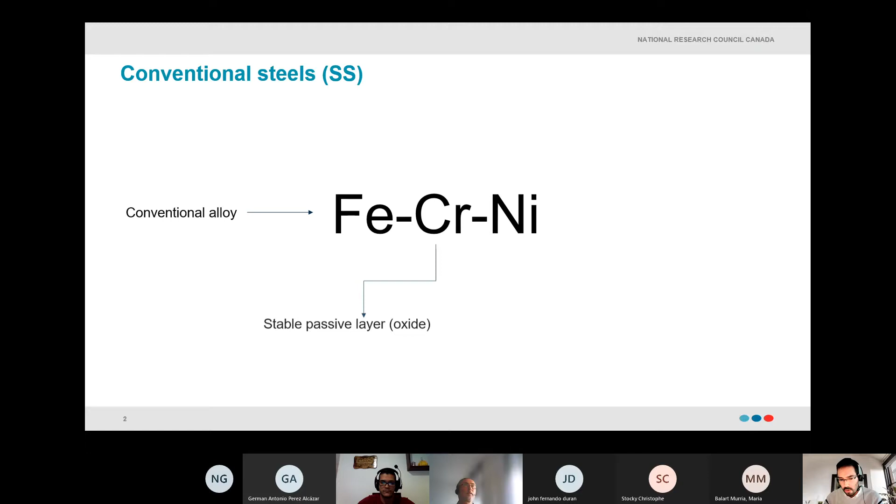So conventional steel, there are many, but I decided to put here the stainless steels. We already know that chromium forms a stable passive layer, and nickel is a gamma stabilizer. Both of them are expensive elements.

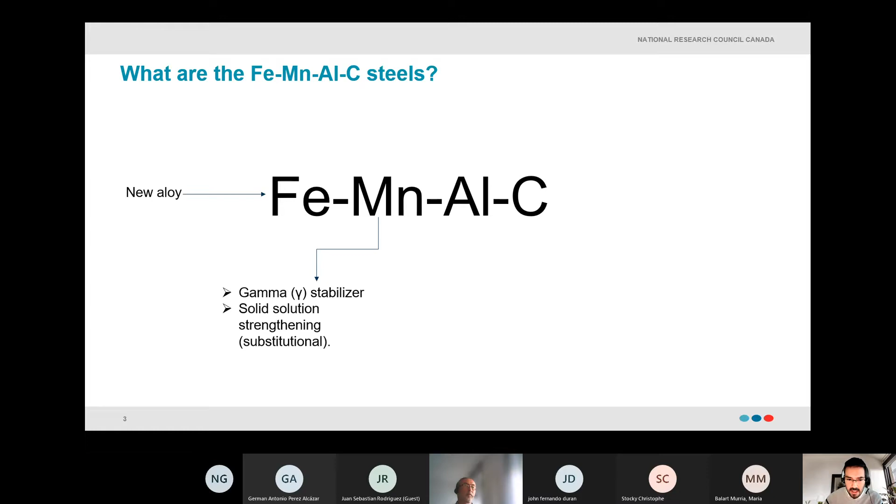So what are the iron, manganese, aluminum, carbon steels? Basically, it's a kind of new alloy which consists of manganese, aluminum, and carbon. And the manganese has the same effect as nickel, because manganese is a gamma stabilizer, a solid solution strengthening element in the substitutional way.

The aluminum in this case produces a stable passive layer similar to chromium. The aluminum is also a ferrite stabilizer, favors the κ-carbide precipitation, and due to its very low density, it will decrease the steel density in a remarkable way. And the carbon is a gamma stabilizer and solid solution strengthening element in the interstitial way.

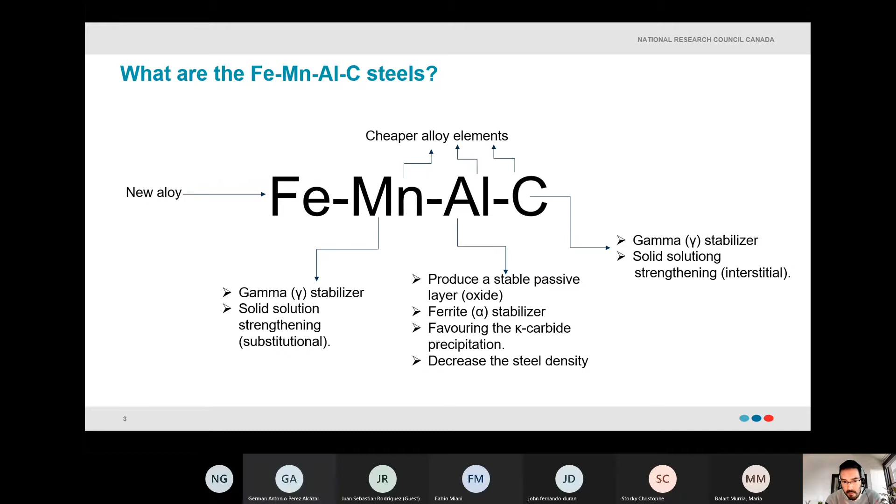But the main difference with conventional alloys is that manganese and aluminum are cheaper alloy elements, and that is really important in the market. Here is a brief figure about how the interest in these alloys has become important in the last 50 years. This is a chronological result in Scopus using two different search terms, iron manganese aluminum carbon, and lightweight steels. So we can see that over the last 50 years, the interest is going up drastically.

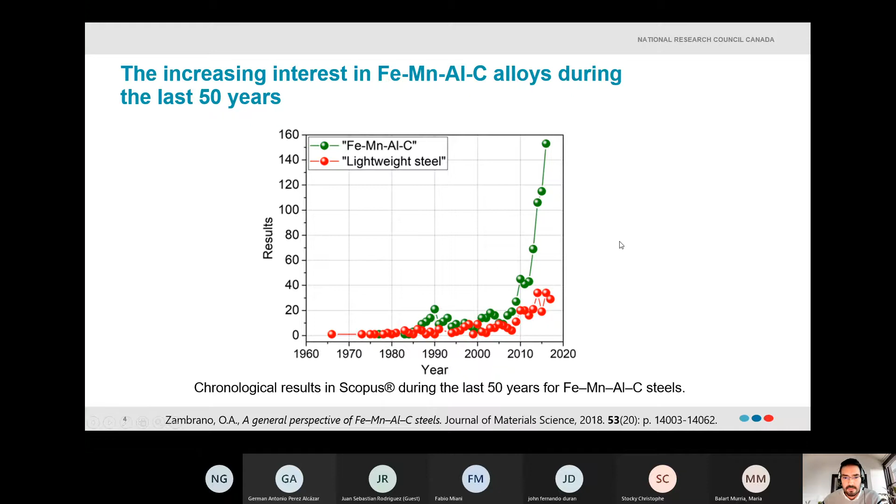Let's look at some mechanical properties of these manganese alloys to put us in context. On the y-axis we have elongation, and on the x-axis tensile strength. We have different families: aluminum, magnesium, titanium, and the whole range of carbon steels with different heat treatments. What makes these materials special is the good combination between elongation and tensile strength. We have a family of these alloys with different manganese and aluminum contents, which makes for really interesting different applications.

Here is a graph of mass density versus aluminum content. As we increase the aluminum content, we get a drastic decrease in density. We can achieve density reductions of about 18%, meaning close to 6.5 grams per cubic centimeter, when compared with conventional steels at 7.8. So we have a really interesting effect of aluminum in these alloys, and that's the main reason these alloys are called lightweight steels.

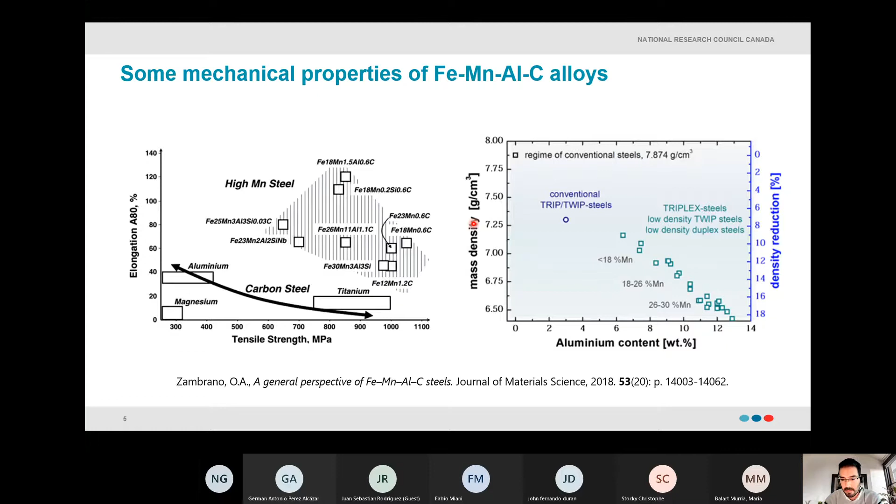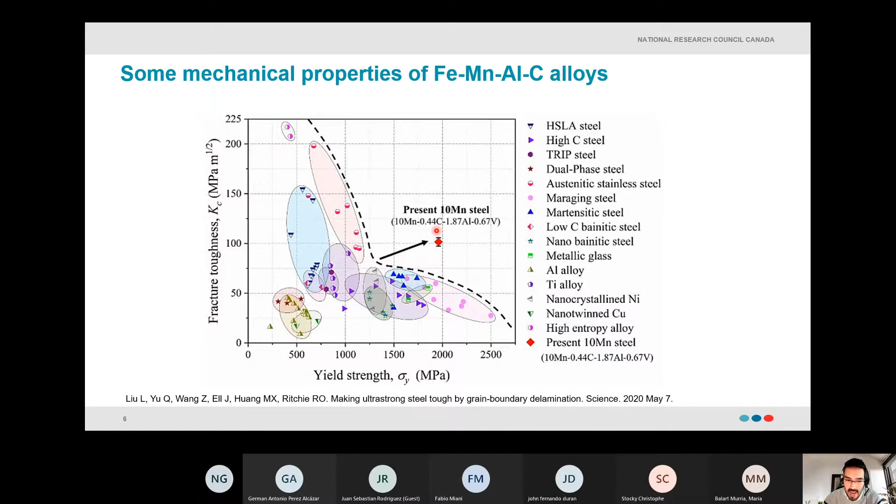This image was taken from this research, where they developed a new manganese aluminum alloy. We can see here how the properties as a function of fracture toughness and yield strength compare to other families. For instance, austenitic stainless steel is this pink circle here. Austenitic steels have really good fracture toughness, but the yield strength is below 1 gigapascal, though still pretty good. Comparing with high entropy alloys, the new trend in physical metallurgy, we see really high fracture toughness, but the yield strength is still too low. If we make the same analysis for other materials, we can see how manganese steel stands out when compared with them, achieving really high fracture toughness while keeping the yield strength.

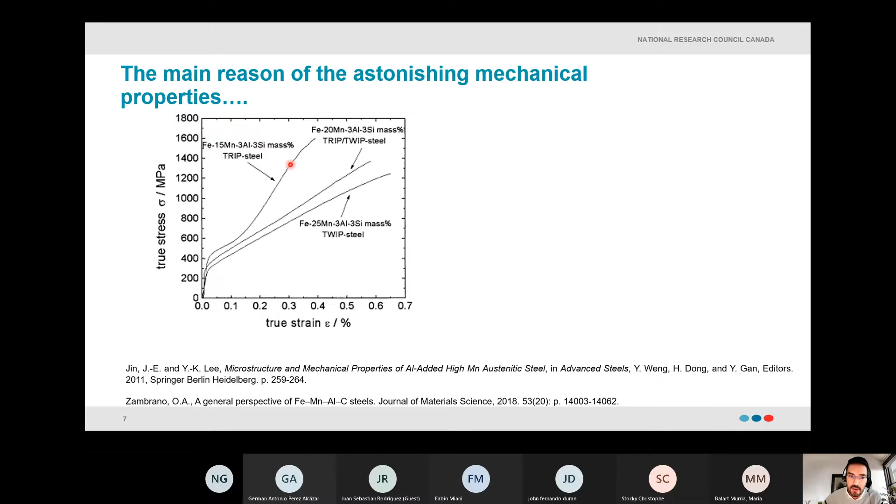The reason behind that is that with this alloy, we can control the chemical composition and the stability of the austenite. By austenite stabilization, I mean we can control the chemical composition to make the austenite less stable or more stable, and that is reflected in different deformation mechanisms. If we make the austenite really unstable, we can promote transformation from austenite to martensite. If we make it more stable, but not too much, we can favor the formation of mechanical twins. And if we make it too stable, we get the formation of microbands made of dislocation arrays. These special deformation mechanisms, which we can control by chemical composition and temperature, determine the mechanical properties of this material.

I want to give a general overview of the current state of FeMnAlC alloys in different industries. In the energy and transportation industry, the world's fourth largest steel making company has been doing research on these materials. They patented these materials in 2013, and currently they are producing liquefied natural gas vessels using this kind of alloy.

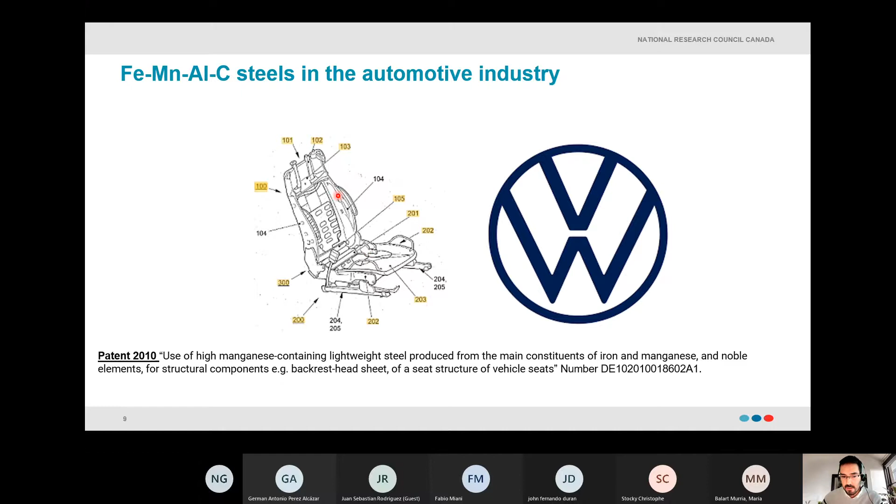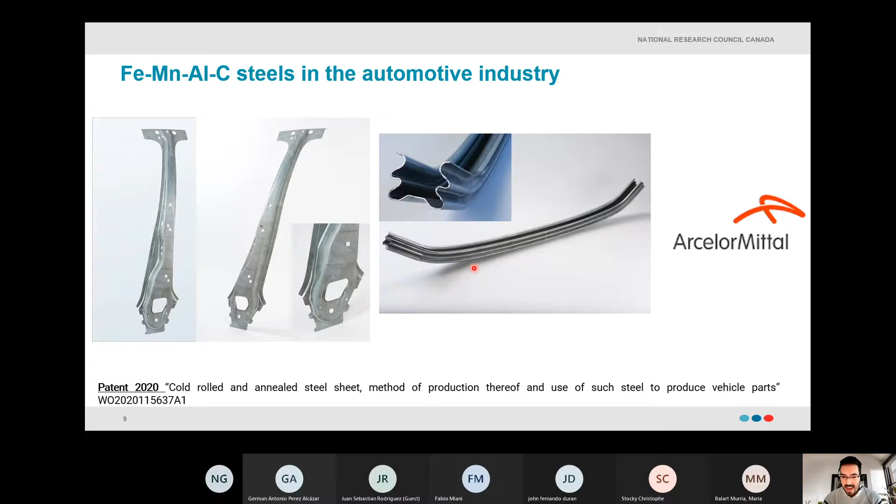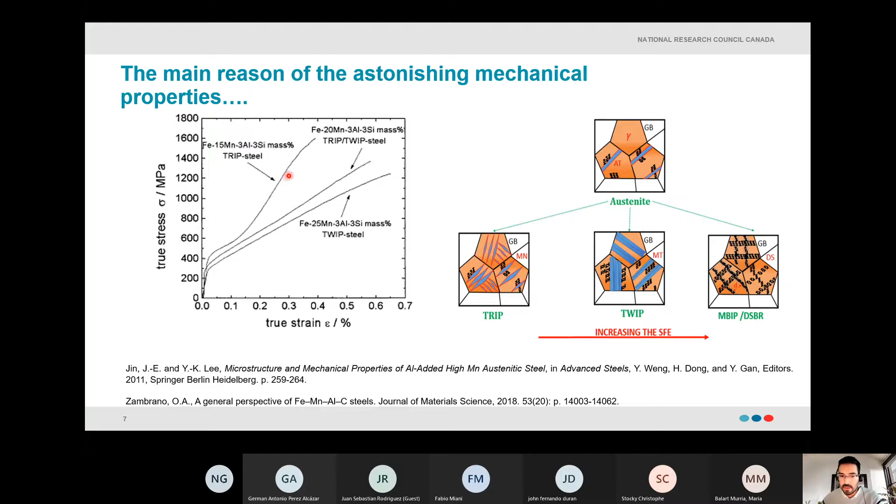In the automotive industry, Volkswagen obtained a patent in 2010 about replacing conventional alloys with this material for seat frames. Similarly, ArcelorMittal patented a method in 2020 for producing these alloys for body car frames. The reason is that in a car accident or crash, the high energy during that process can be absorbed by this material through strain hardening—it becomes harder while also providing some deformation. That's the main reason for choosing this material.

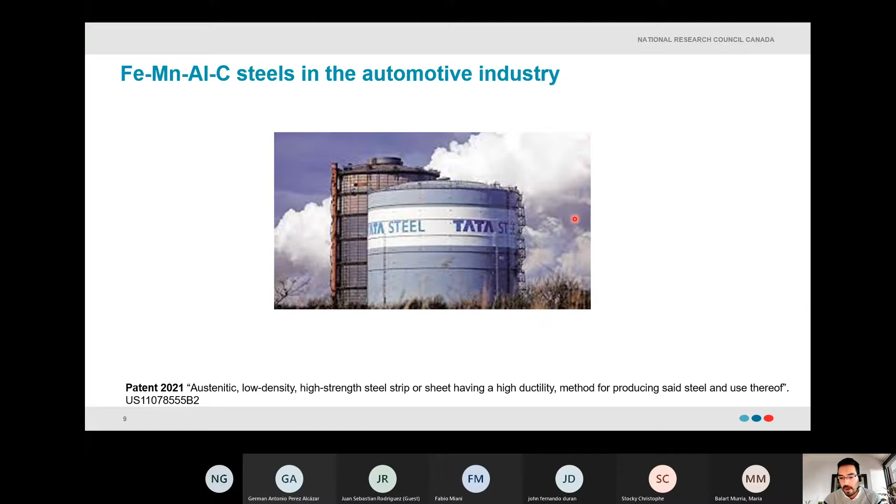Also, Tata Steel patented different methods for producing this kind of alloy in 2021. In 2019, a patent was filed in the army industry context about high aluminum manganese steels. Currently, they are exploring this material for ballistic applications, for instance for tanks and armor.

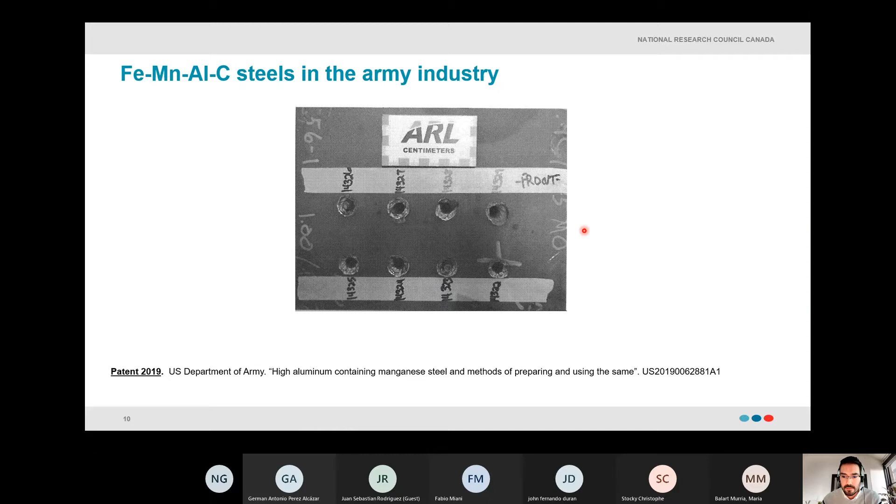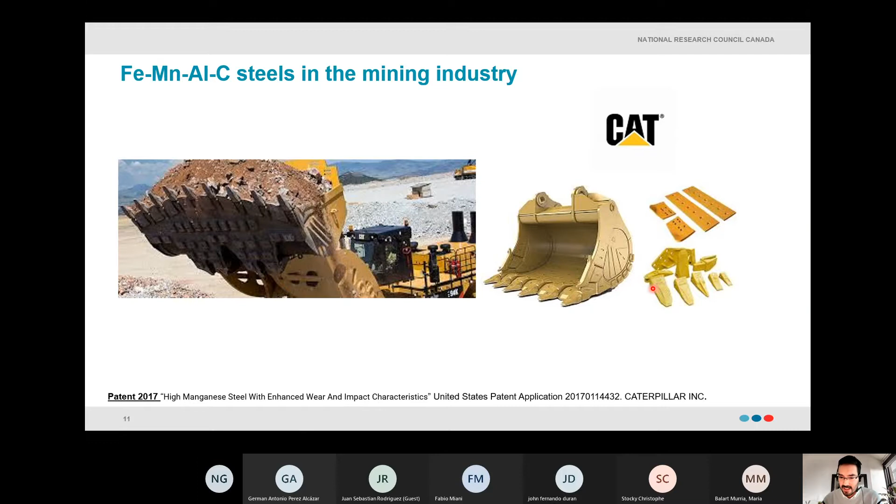In the mining industry, for instance, CAT patented in 2017 different alloys based on iron, manganese, aluminum, and carbon to replace shovel teeth. So basically, they are exploring new materials that can withstand longer times than conventional alloys.

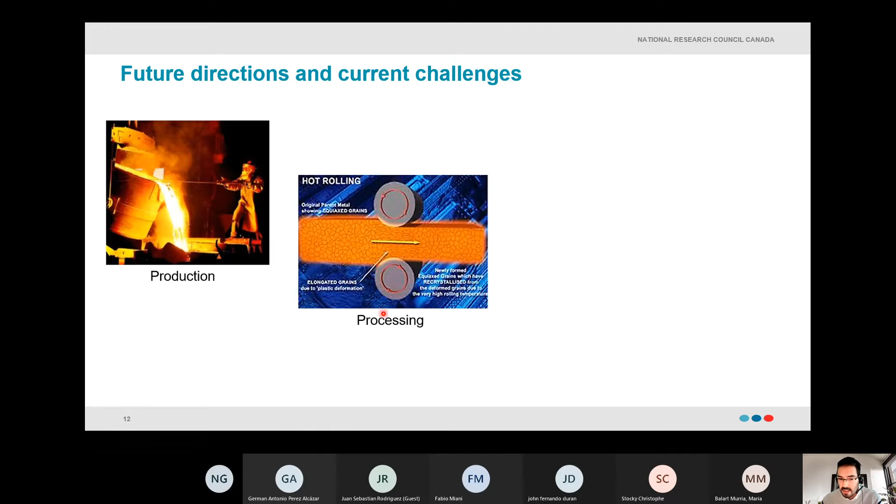In my perspective, the future direction and current challenges are the production of this alloy. Still, there are many challenges in the processing itself and the applications, so there is too much to explore about this material. Currently they are being used for car body frames, but there are many other applications these materials can be applied to.

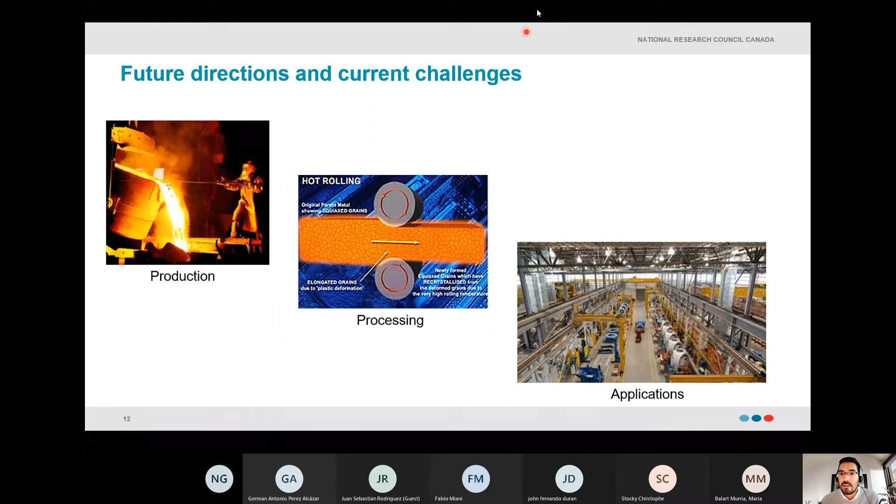So that's what I wanted to say, and I will let the floor go to my colleagues, Sebastian, John, and Professor Germán.

Okay, thank you so much. It's a very nice, quick presentation that takes a very interesting perspective. Okay, thanks.

Hello, everyone. Continuing from Oscar's presentation, Professor Germán, John Duran Perdomo, and I will be talking about a presentation on FeMnAlC Steel.

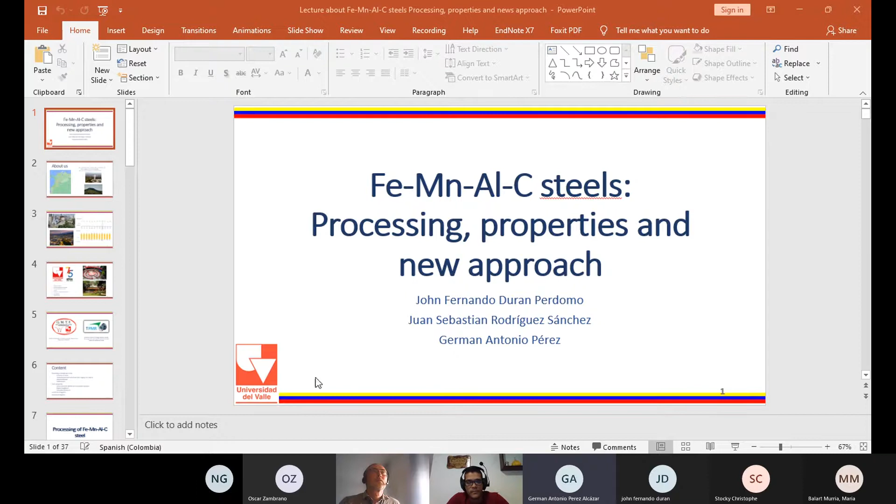Okay, thank you. Well, this is a work that we are performing now. It's a project that we presented to our science ministry and it was approved, joined with a local industry called Organización Hércules.

They are producing sugarcane goods, and the project has the objective to produce iron, manganese, aluminum, carbon steel in order to obtain the best properties to produce sugarcane goods.

This is the project in which we are working now, okay? And John, Fernando, and Sebastian are the doctoral students that are working on this project, okay?

Recently, they were in Mexico, in Morelia, at the Michoacán University, producing 4 alloys, those that we found with the best properties, in order to make a semi-industrial production, melting them in an induction furnace and then rolling them in place to produce the sugarcane goods.

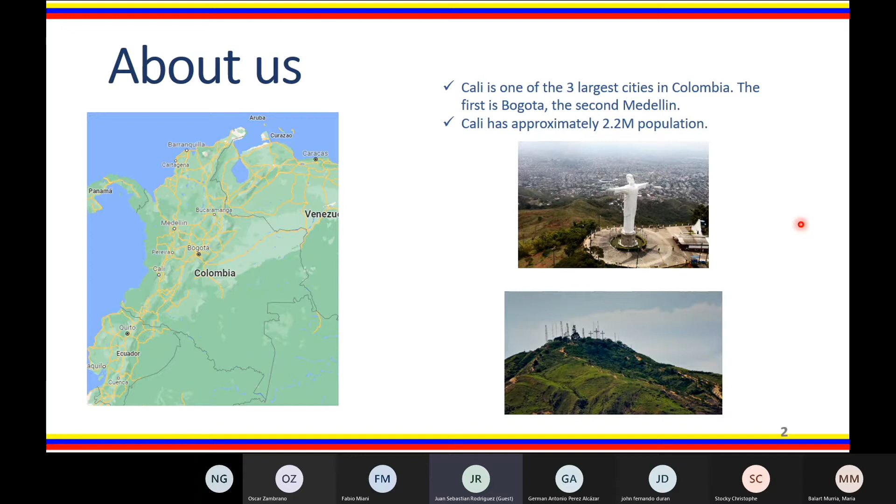One is Cristo Rey. This is Cristo Rey, a monument similar to Cristo Redentor in Rio de Janeiro, located on the Hill of Tres Cruces. According to history, it was made to scare away a demon that in ancient times was in a tomb.

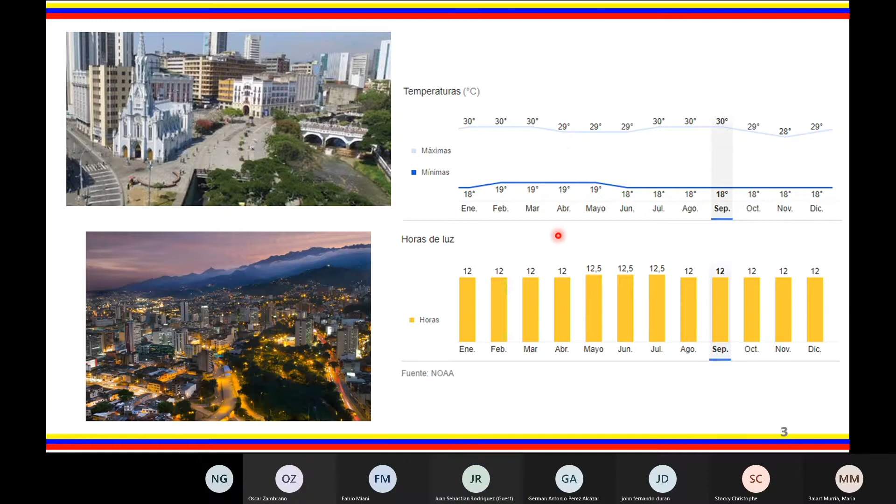As for us, we are researchers who belong to the Universidad del Valle. This university is one of the most important in Colombia. It is a public university and was founded 76 years ago. The university is divided into 7 faculties.

Professor Germán and John belong to the Faculty of Exact Sciences; they are physicists. I belong to the Faculty of Engineering; I am a materials engineer.

Currently, the group that developed this research work is the Physical Metallurgy and Phase Transition Theory group from the Department of Physics, and the research group of Tribology, Polymers, Powder Metallurgy, and Processing of Solid Waste from the Materials Engineering School. This is a research project developed by physicists and engineers.

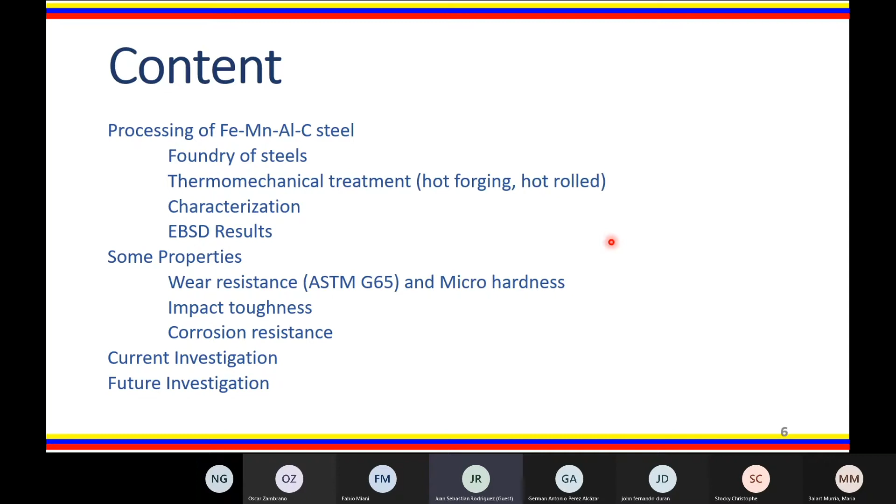The content of the presentation is presented below. This covers processing of FeMnAlC steel, foundry of the steels, thermomechanical treatment, hot forging, hot rolling, characterization, EBSD results, and some properties: wear resistance and micro hardness, impact toughness, corrosion resistance, and current and future investigation.

Here we will mention some of the most important results of our research, and at the end we will be willing to answer some of your questions, and welcome colleagues from the Universidad of Udine. Let me, please—John Fernando Duran continues.

Good afternoon, everyone. My name is John Fernando Duran Perdomo. I am a physicist and PhD student in physical science at the University of Valle in Colombia. I work in physical metallurgy with Dr. Germán Antonio Perez.

In the case of cast alloys, it's necessary to perform thermomechanical treatment to eliminate the as-cast state. As you can read in our paper, a long time solubilization treatment can eliminate the as-cast state, but with an increase in grain size, involuntary evaporation of some elements, as well as interaction of the alloy elements with oxygen. Thus, we are exploring two thermomechanical processes for these alloys: hot compression and hot rolling.

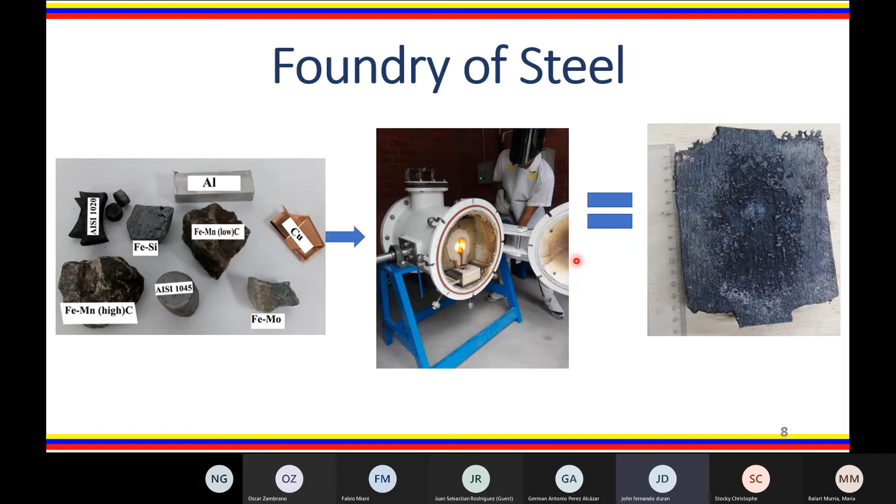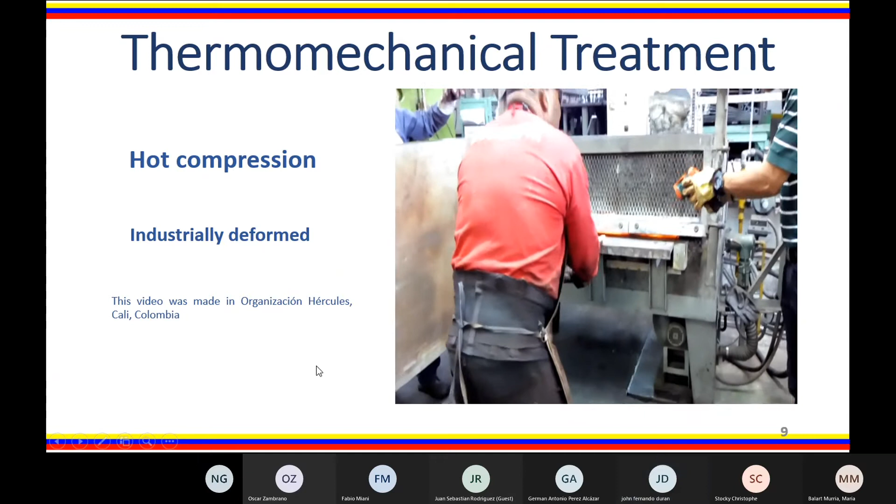There are two thermomechanical treatments that we are carrying out with the alloy studied so far. The first is hot compression deformation while maintaining the furnace temperature between deformation steps, and the second is hot rolling. You can see in the video the hot compression deformation at Hercules organization in Cali, Colombia.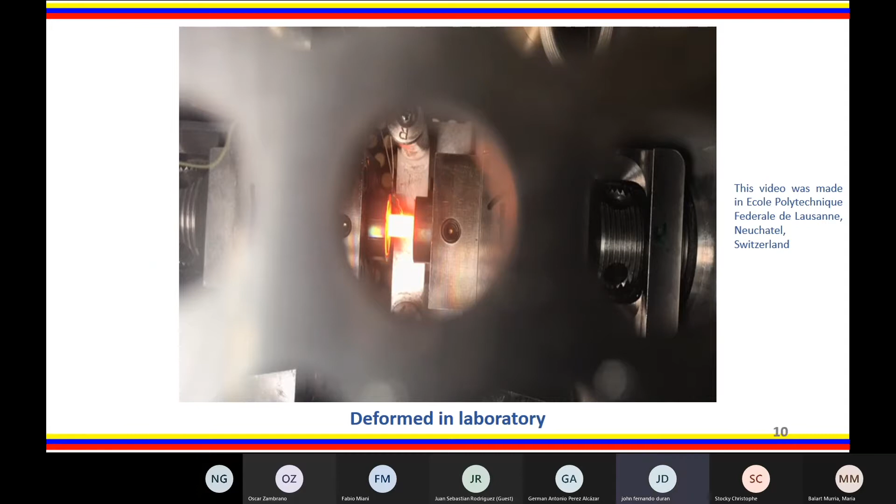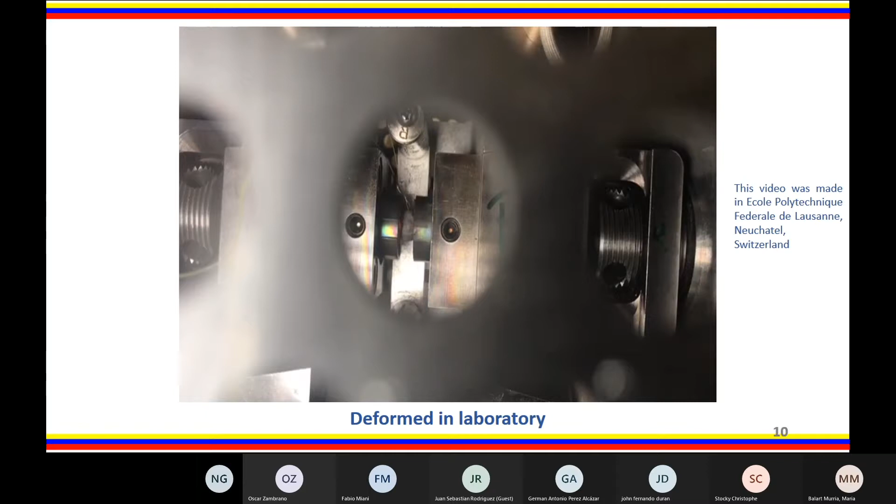I think you didn't click, Sebastian. Okay, it's taking, maybe you can repeat. Next, Sebastian.

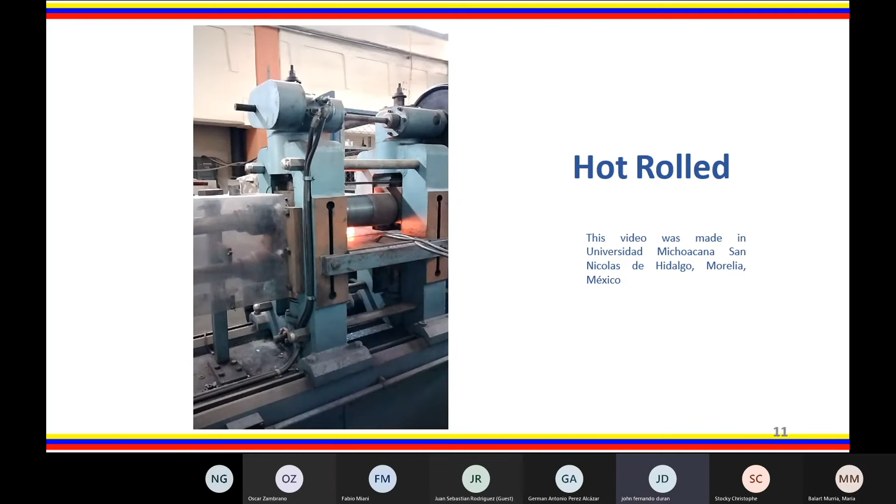Like I said, these alloys have been hot rolled. This sample was produced at the Michoacán University in Mexico. You can see different lamination steps are performed.

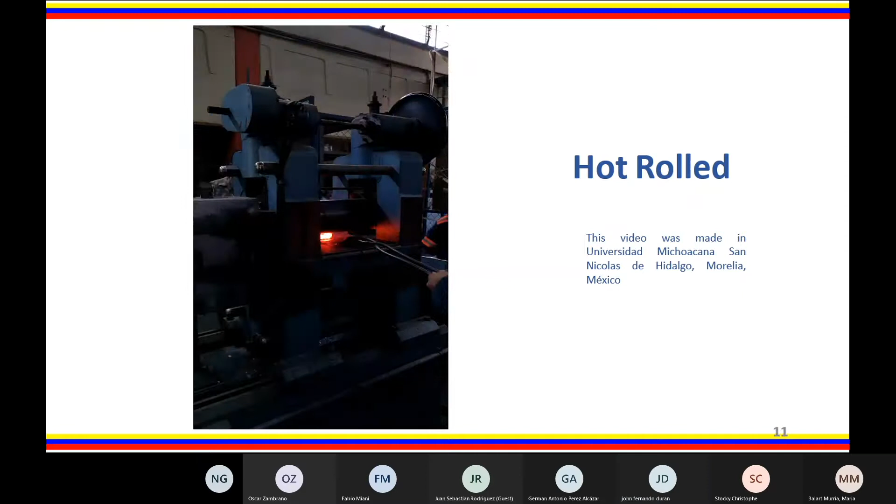To characterize these alloys, we have used different techniques, including Mossbauer spectroscopy, X-ray diffraction, and electron backscatter diffraction.

In the case of Mossbauer spectroscopy, there are three types of hyperfine interactions. The first is isomer shift, you can see a singlet, in this case one peak in the spectra. The second, the quadrupole splitting, you can see a doublet, in this case two peaks in the spectra. And finally, hyperfine field with six peaks in the spectrum, in this case one sextet. These three interactions characterize the chemical environment of iron atoms.

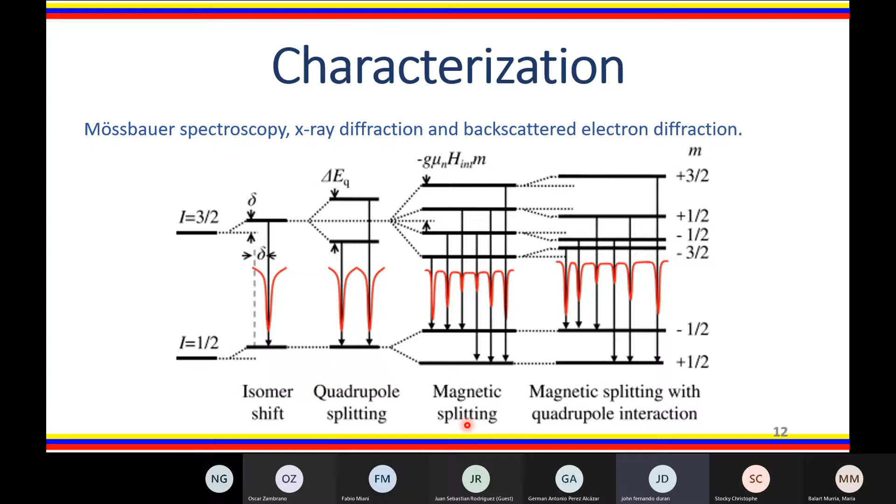Different phases have been reported in FeMnAlC alloys, including austenite, ferrite, martensite, kappa carbide, beta manganese, and other carbides. The figure on the left shows an austenite structure of the steel without any alloy elements. When elements such as manganese, aluminum, molybdenum, and silicon are added, they could replace iron atoms, like shown in the figure, where X represents the different solute atoms.

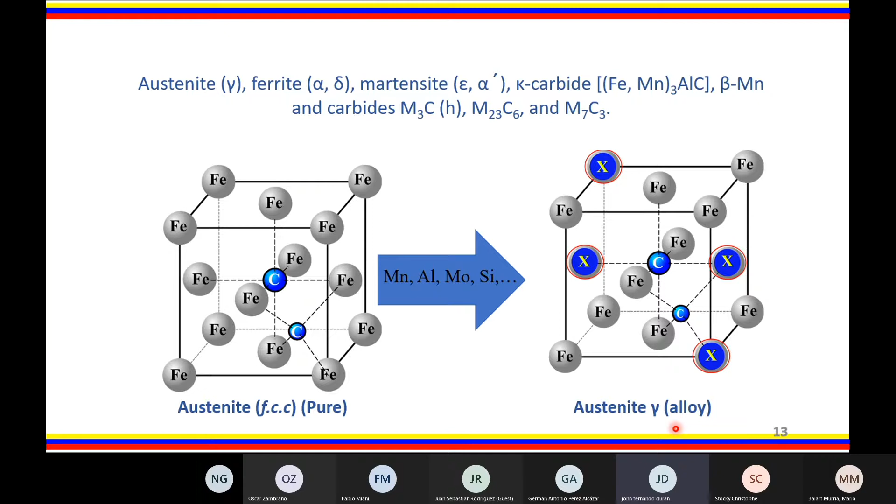The first equation represents the complete spinodal decomposition of austenite proposed by Cheng. In the second equation, you can see the partial spinodal decomposition of austenite that we propose in our paper. Thus, there are 3 austenites: 1 normal or initial, 1 rich, and finally 1 poor in solute atoms, as you see in the figure.

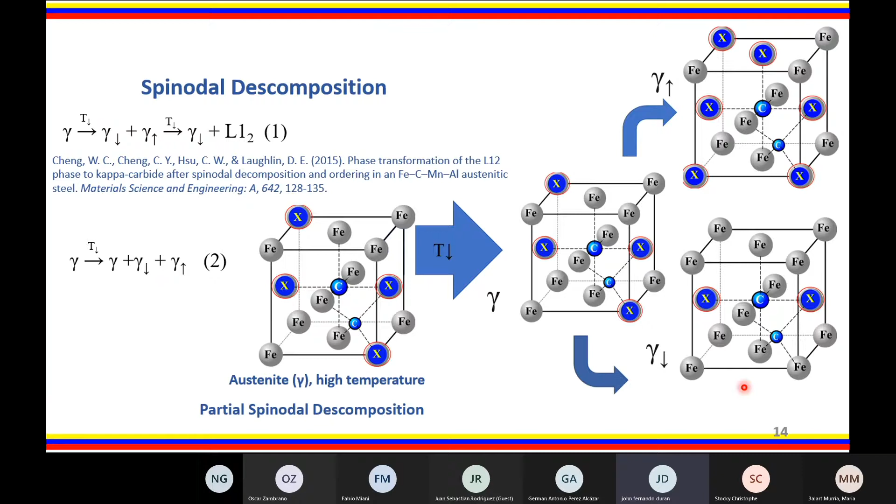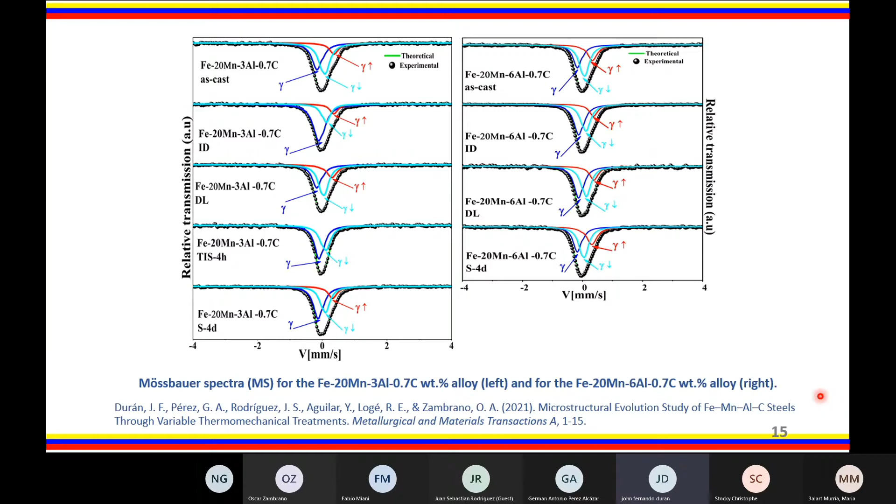In this figure, you can see the value of isomer shift remains within the error bars without considering the treatment performed on the alloy.

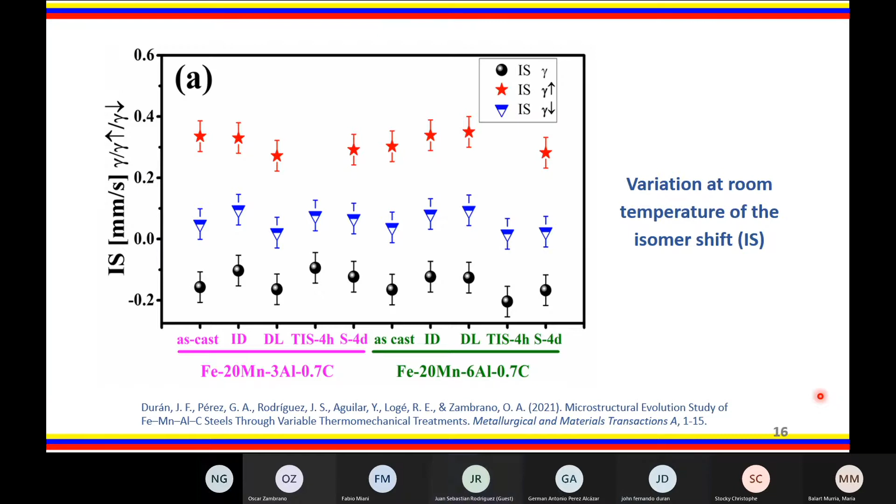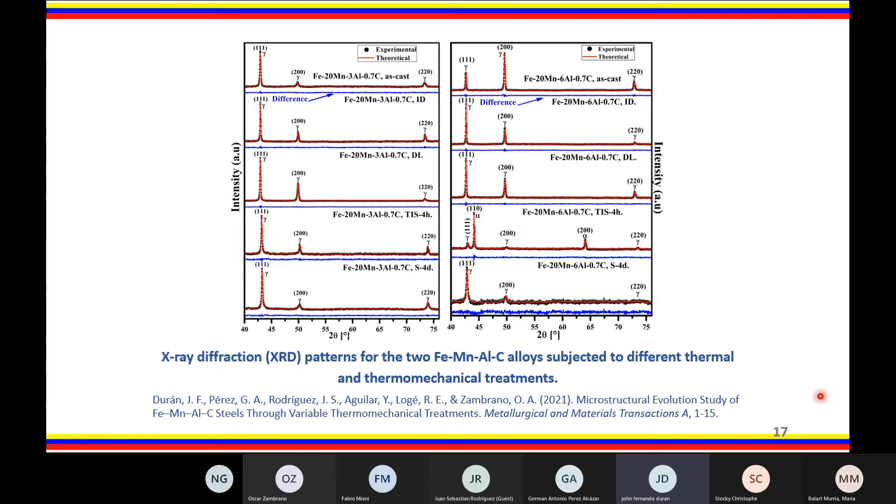All Mossbauer spectroscopy results were validated by X-ray diffraction. In this case, the Rietveld refinements were carried out using 3 austenite phases with small variations of the lattice parameters.

In Zambrano's research, Mossbauer spectroscopy has been used to characterize kappa carbides in FeMnAlC alloys. The kappa carbides have a magnetic behavior, sextet or field distribution are observed, while austenite has a paramagnetic behavior, singlet or doublet are observed.

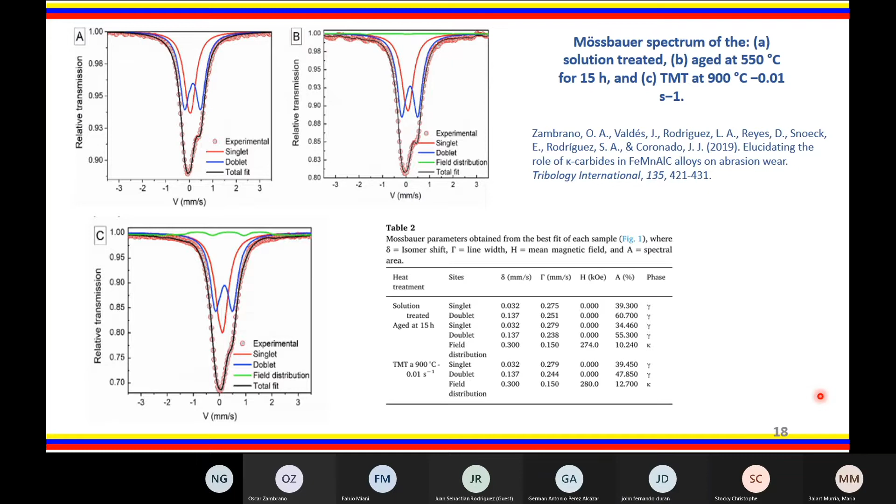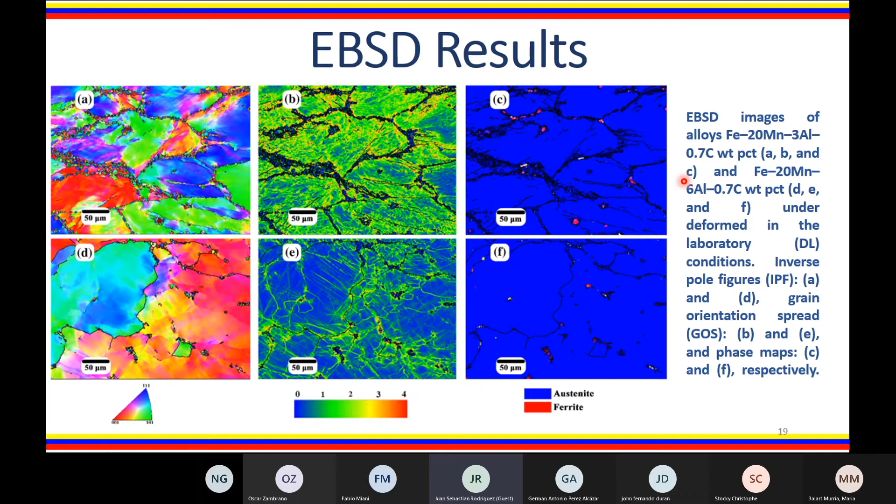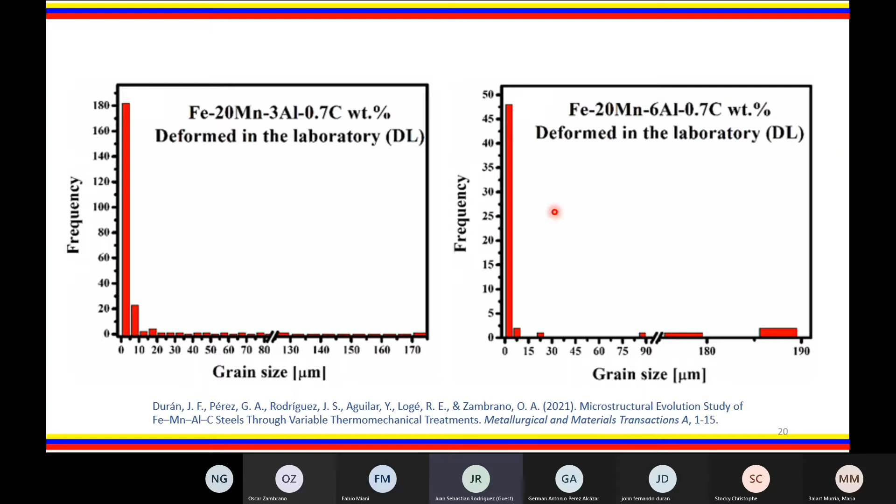Finally, a phase map is presented, in which a small ferrite formation is evident, but according to Mossbauer and X-ray diffraction, this condition does not have ferrite. It is assumed to be a result of improper data indexing. In order to quantify the effect of dynamic recrystallization, grain size distribution was performed, which clearly indicates that at one deformation step in both alloys, there is a process of formation of new extremely fine grains.

When looking at the result of the industrial deformation process, large differences are observed. It is important to mention that the industrial deformation process consisted of heating and deforming, repeated 3 times, and finally quenching.

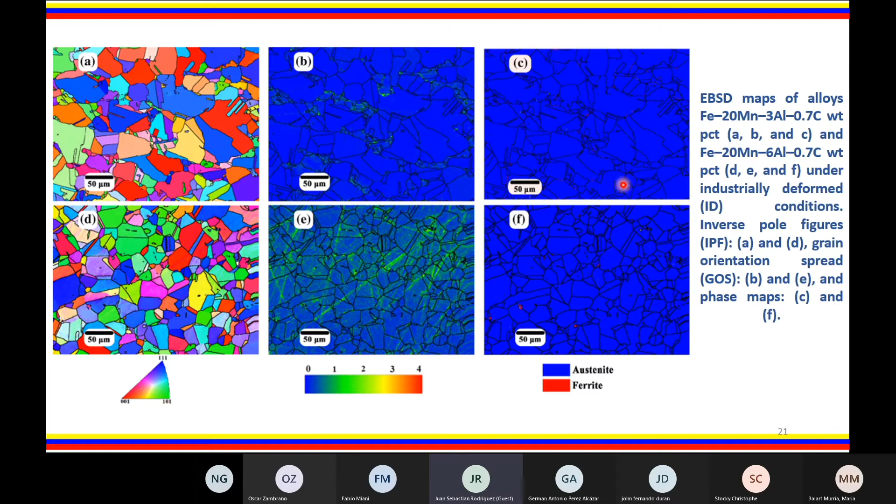In summary, at this point we have studied the dynamic recrystallization behavior of two compositions of FeMnAlC steel with 2 different processing conditions, in which the one consisting of 3 deformation-heating steps obtains an optimal structure in terms of engineering application. At this point, the question arises: how is the dynamic recrystallization process when the aluminum content is varied with a fixed manganese composition?

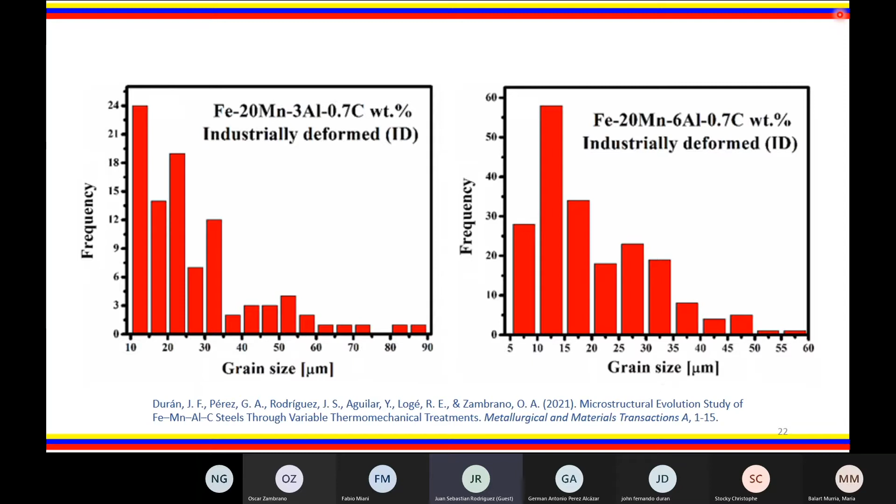The answer to this question is covered by a research work currently submitted to the journal Materials Characterization. Its title is 'Effect of aluminum content on the dynamic recrystallization of this FeMnAlC steel composition during thermomechanical hot forging treatment,' currently under review, submitted to Materials Characterization.

What was done in this work was to vary the aluminum content at 0, 3, 6, and 9%. The processing is by hot forging through 3 deformation-heating steps.

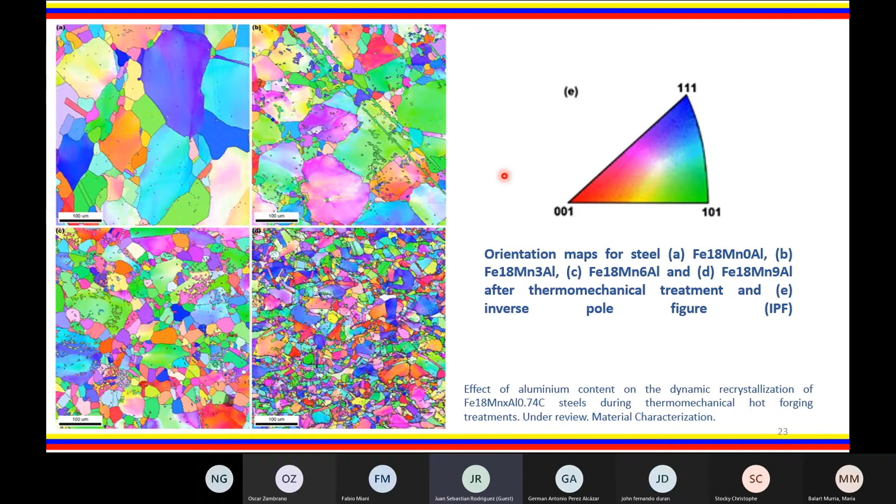In this figure, crystallographic orientation maps of the thermomechanically treated FeMnAlC samples are represented. The microstructure of the material does not result in preferential orientation. In contrast, the growth arrangement of the grains with respect to the crystallographic direction was completely random.

On the other hand, the figure corresponding to the grain orientation spread of these alloys is presented. It is interesting to observe that the degree of misorientation is low, which coincides with the previous work and indicates that the grains are newly formed by the hot forging process.

In addition, the formation of the necklace structure is also appreciated, which is a clear indication that this process occurred through discontinuous dynamic recrystallization.

Something quite interesting to appreciate is that increasing the aluminum content of these alloys generates grain refinement. We will delve into this later.

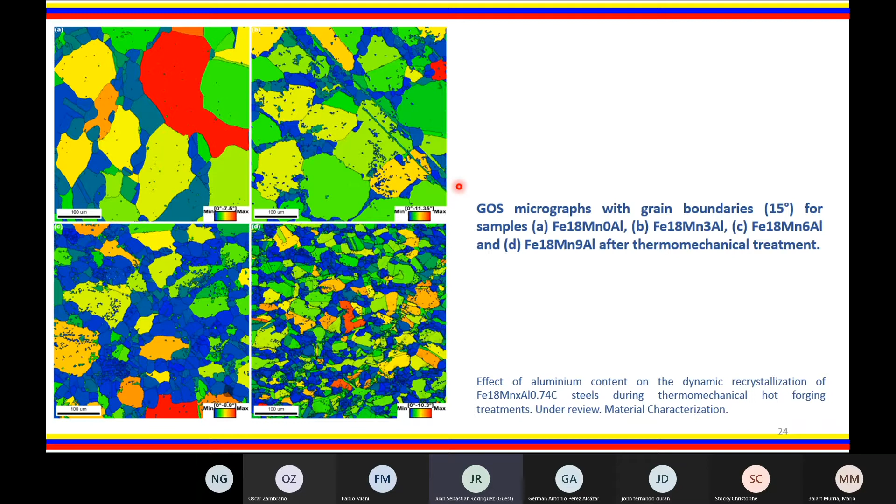According to the characterization of these samples via X-ray diffraction and Mössbauer spectroscopy, only the sample with 18 manganese, 9 aluminum is duplex steel, that is, austenite plus ferrite.

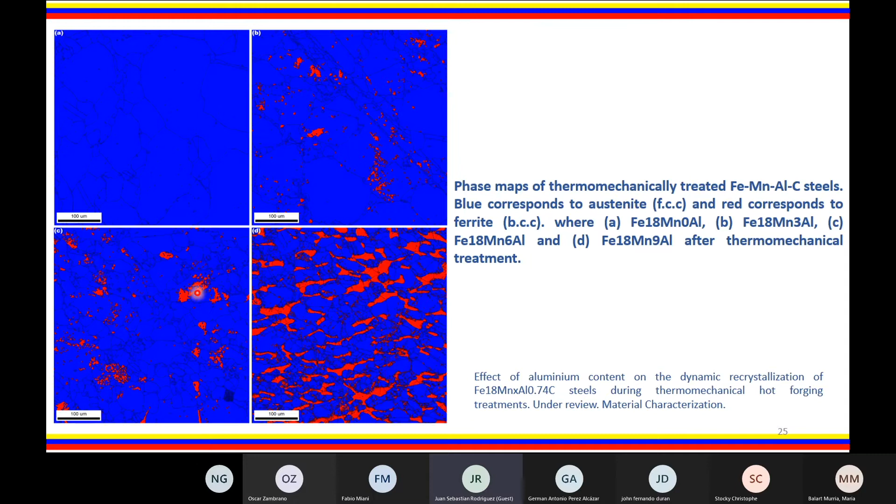The others are austenite. The small areas that appear in the samples 18 manganese 3 aluminum and 18 manganese 6 aluminum are due to poor indexing of the data.

Finally, the micrographs are shown with annealing twins.

In this case, it is observed that the variation in aluminum increases the area fraction of the twins, which is directly related to the increase in dynamic recrystallization.

The explanation for the refinement of the microstructure through thermomechanical treatment is based on the following hypothesis: it is very likely that the lower aluminum content favors the rapid generation of differences in dislocation densities between different regions, which generates many sites for recrystallization of the grains.

By continuing the thermomechanical process, the previously formed grains grow at the expense of others and consume the density of remaining dislocations, leading to growth of grain size.

On the other hand, in the samples with higher aluminum content, the samples have difficulty generating sufficient dislocation density difference between regions in a short time. Therefore, the creation of numerous nucleation sites for new grains is facilitated. For this reason, discontinuous dynamic recrystallization can be observed more easily in samples with higher aluminum content.

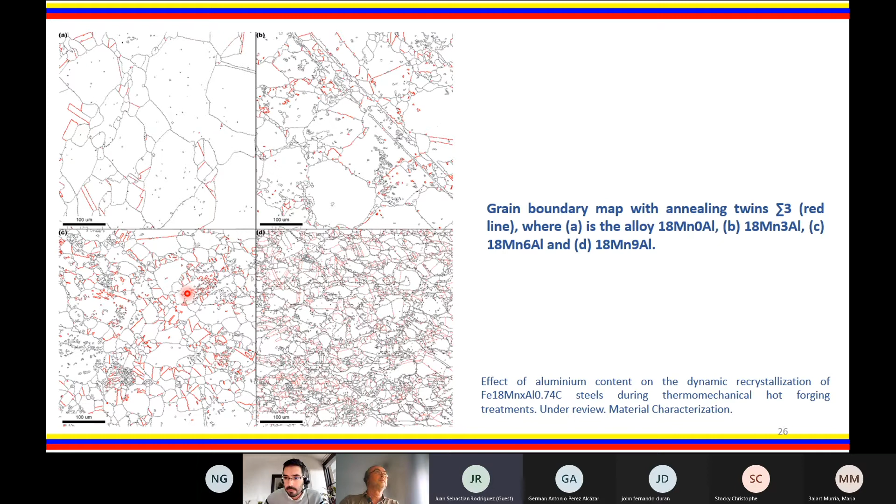In this study, the deformation steps and temperature were varied. Dislocations play a very important role in the processing of this steel. The article from this internship is in process. We are characterizing all the results by X-ray diffraction, Mössbauer spectroscopy, and metallography. EBSD is also scheduled to be performed on this sample.

After talking about processing, we will talk about some properties that we have studied on FeMnAlC steel. It is important to mention that the microstructural condition of this steel is that obtained from the thermomechanical hot forging treatment in sheet steel.

The figure presents the result of abrasive rubber wheel wear. A relationship is made between the loss of volume and the hardness of the material after the thermomechanical treatment. The results are quite interesting. It is important to appreciate that the hardness of this steel does not depend on the loss of volume.

It can be seen that FeMnAlC steels of high hardness have the highest volume loss. This is also due to the increase in aluminum content. One of the explanations for this behavior is based on the stacking fault energy. Increasing the aluminum content increases this energy.

Therefore, this increase generates a transition from hardening mechanisms such as TRIP and TWIP toward others with higher stacking fault energy, such as dislocation glide.

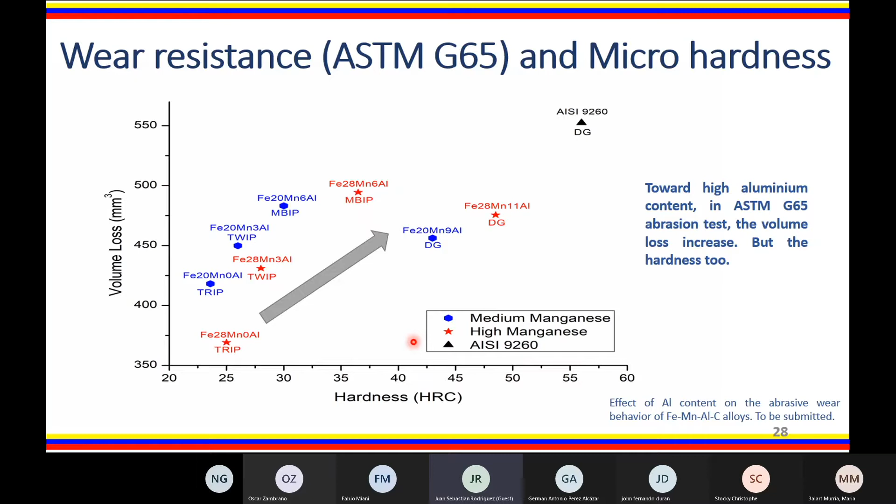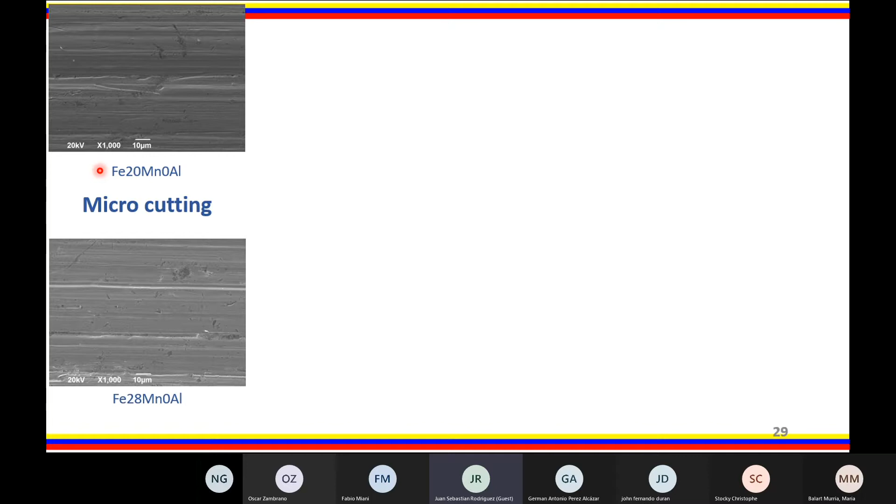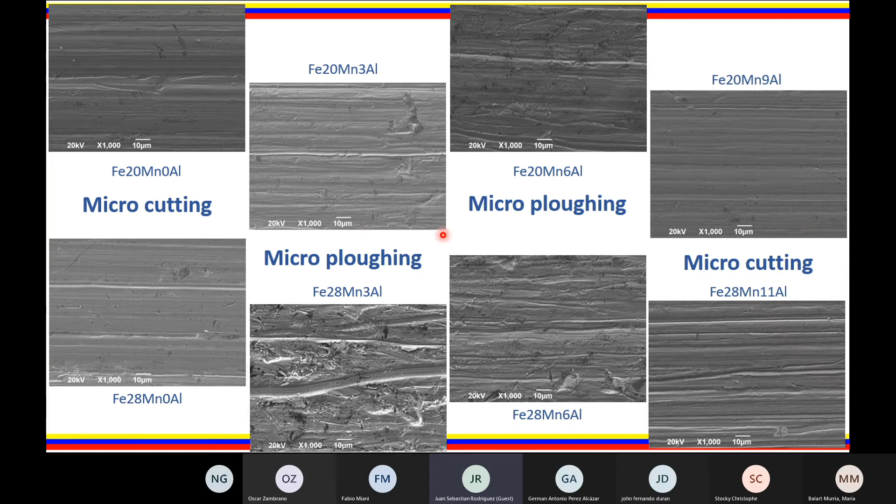In the analysis of the wear surface, we find something quite interesting: low hardness steel with zero aluminum, as well as high hardness steel with 9% aluminum, both present microcutting, while the medium aluminum content shows high microploughing. This serves as evidence to continue with the hypothesis that plasticity hardening mechanisms improve wear resistance at the surface level.

On the other hand, we present the effect of aluminum content on impact toughness. It is important to note that the increase in solid solution hardness in FeMnAlC steel affects their impact toughness, causing it to decrease considerably. Increasing the aluminum content, the toughness of the material decreases.

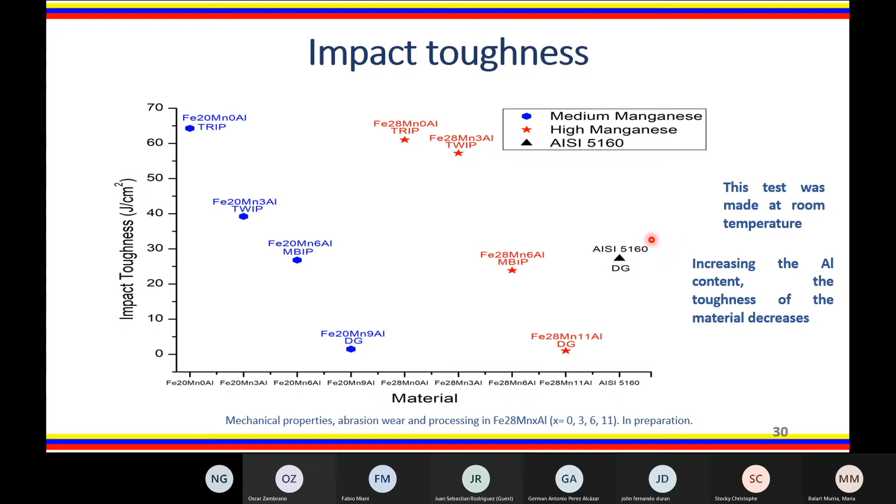By analyzing the fracture surface of these steels, we observed the transition between a ductile fracture surface, with 0 and 3% aluminum, showing dimples, up to a brittle fracture surface showing cleavage. In the case of this manganese content, the transition between ductile and brittle occurs when the aluminum content is 6% by weight.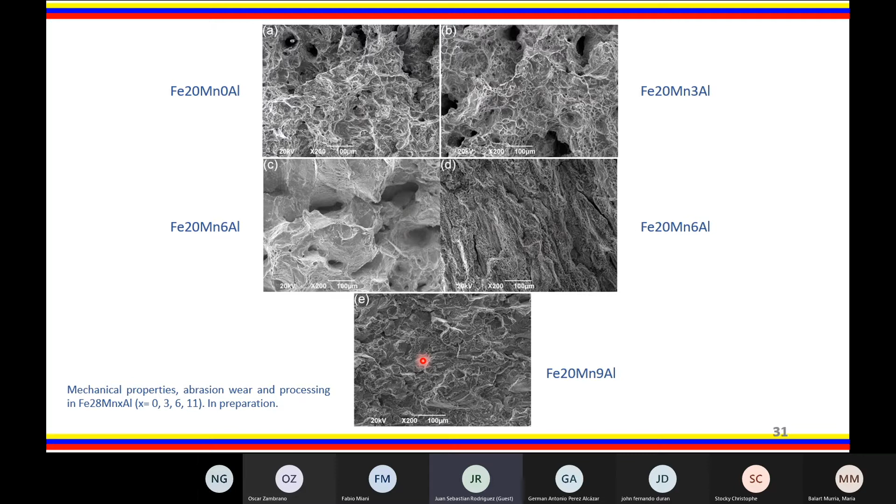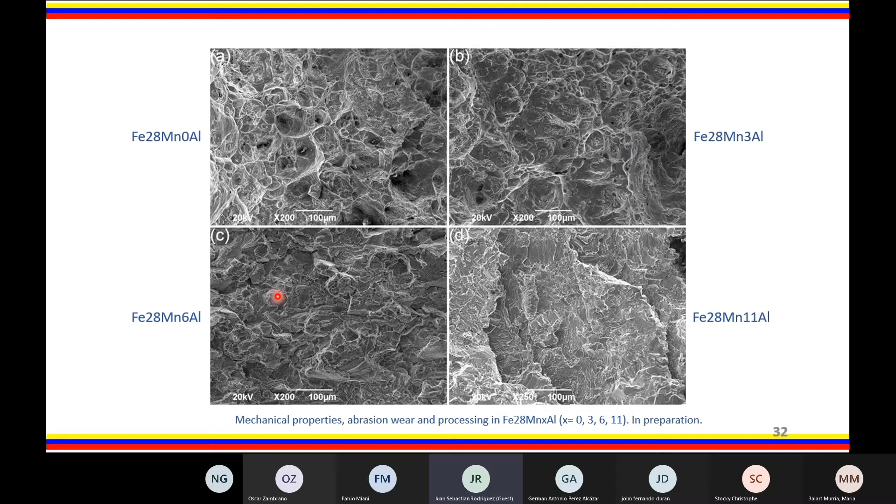For the alloy family of 28% by weight manganese, the same trend is observed. Up to 6% aluminum has a ductile fracture surface. From 6% aluminum onward, the fracture surface changes and has the characteristics of a brittle fracture surface.

Leaving aside mechanical properties, we also proposed to study the corrosion resistance of FeMnAlC steel. For this case, we only did a study on 20% manganese steels. According to the state of the art, increasing manganese decreases the resistance to corrosion. To evaluate the resistance to corrosion, we studied an acidic medium, a neutral medium, and an alkaline medium.

In this figure, the Tafel curves for sulfuric acid are represented, in which we observe that in general the behavior of FeMnAlC steels in this medium is the same for any aluminum content. When comparing with stainless steels, it is observed that there is a great difference in corrosion density and potential. It is clear that the behavior of stainless steel is much better than FeMnAlC steel.

The same can be observed in hydrochloric acid, where the behavior is very similar, although among the FeMnAlC steels, the 3% aluminum steel has more cathodic potential values and lower corrosion density values compared to the other FeMnAlC steels. In general terms, it is concluded that the corrosion resistance of FeMnAlC steel is lower than stainless steel.

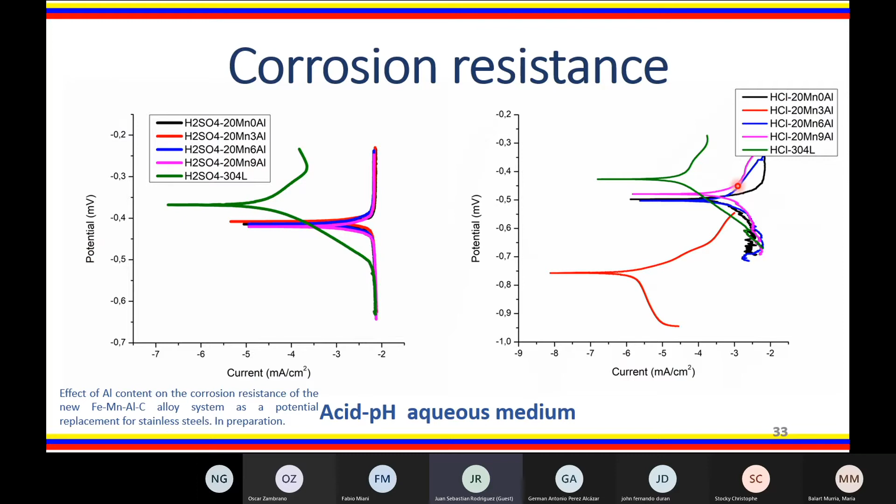It is possible that by varying the content of aluminum and manganese, or by adding some other alloying element, a composition of FeMnAlC steel with high corrosion resistance could be reached.

In the neutral medium of sodium chloride at 3.5% by weight, it is observed that there is no great difference between FeMnAlC steels in terms of corrosion resistance, and that, on the other hand, stainless steel is still much better.

But in the case of an alkaline medium, the situation is a little different. Here we can observe that the behavior in this medium is very similar between FeMnAlC steel and stainless steels. Finally, regarding corrosion resistance, it is stated that the effect of the aluminum oxide layer is not consistent, and its behavior depends a lot on the pH of the medium.

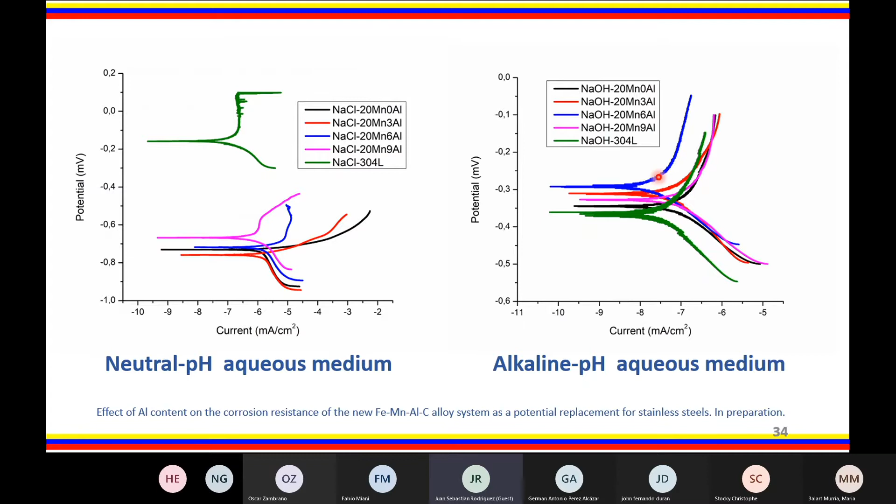Throughout this year of research, we have some articles that are under development, others already under review, and others in the future. These are the following: effect of aluminum content on the dynamic recrystallization of this FeMnAlC alloy during thermomechanical hot forging treatment. This article is under review, submitted in Material Characterization.

Another is effect of aluminum content on the abrasive wear behavior of FeMnAlC alloys, to be submitted. And another is effect of aluminum content on the corrosion resistance of the new FeMnAlC alloy system as a potential replacement for stainless steels, under preparation.

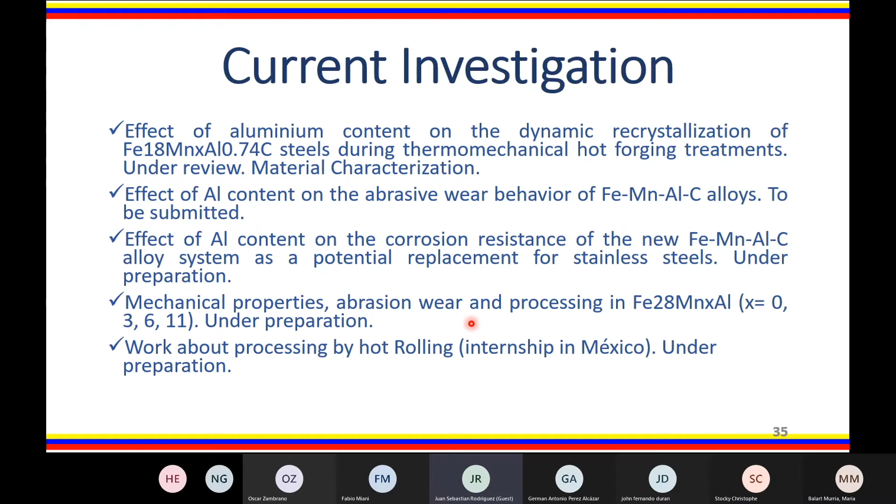Another is mechanical properties, abrasion wear and processing in FeMnAlC 28% manganese alloy aluminum, under preparation. And finally is a work about processing by hot rolling. This is about an internship in Mexico. This is under preparation.

In future investigation, we continue to discover some phenomena that are worth studying in this type of steel. According to the previous results, the future investigations we have to develop are the following: study of the behavior of FeMnAlC steel in aging condition and low stacking fault energy condition for grinding balls, and a study by Mossbauer spectroscopy and X-ray diffraction about spinodal decomposition. How does the evolution of rich austenite, poor austenite, and phase carbide behave as a function of heat treatment?

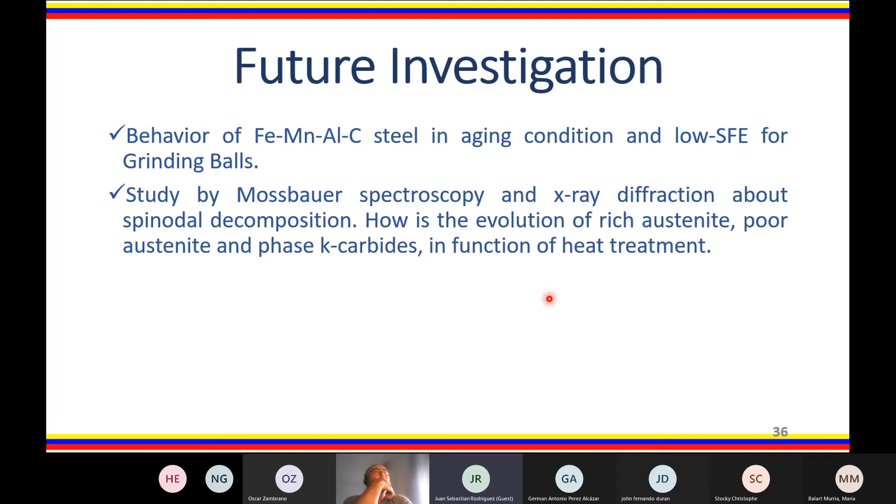Finally, in all this time of work, many new questions continue to arise as we find interesting results, which deeply awaken our interest to continue working on these types of steels.

Very interesting presentations, there is a lot of work starting from very basic issues. Many years ago I was also a Mossbauer man, but not so much anymore. So I have understood most of your presentation, from the industrial topic, and especially the use of aluminum for lightweight steels. It's interesting, and hopefully it will be introduced in the future. So if any of the guests have a question, in an informal way if possible, feel free to ask, and if you'd like to answer it would be nice. Otherwise I will ask some questions myself. Maria, if you want to speak in Spanish there's no problem, because we can understand Spanish but we cannot speak it—like I can understand French, but I cannot speak it. Again, the point is we can keep using English, because after all it's very useful.

So the weight of the sample, this is a very easy question: normally how much do you process, in terms of grams, in terms of kilograms, or what else? You have an induction furnace, and I think you keep the atmosphere in argon, is that right? And then you process it yourself. This is the first basic question, maybe it's a detail.